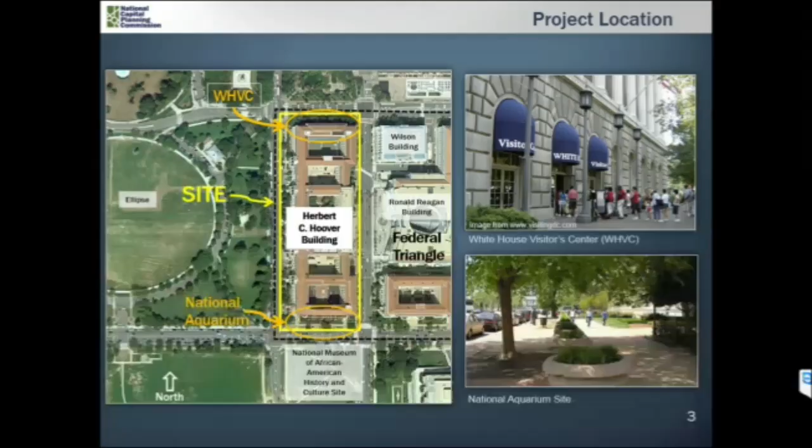14th Street and 15th Streets are major commuter routes into and out of the city. They are also major north-south pedestrian corridors linking the downtown, the White House Visitor Center, which you see here on the upper right, the National Aquarium, the National Museum of African American History and Culture, the Washington Monument, and the National Mall.

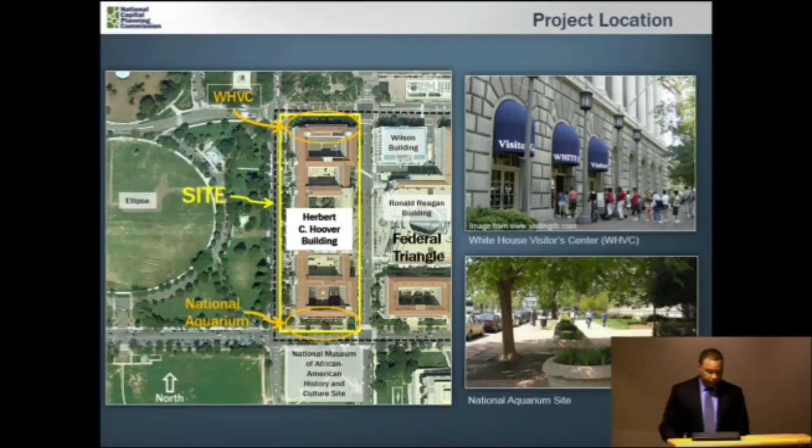Here are a few images of the existing conditions for the pedestrian environment around the building. What you'll notice is that there are long sidewalks with equally long lines of planters. In 2001, the Commission approved the installation of these planters as a security measure for a period not to exceed 18 months. The planters aren't particularly attractive, but they do provide a sense of separation and protection for pedestrians along the busy thoroughfares surrounding the building.

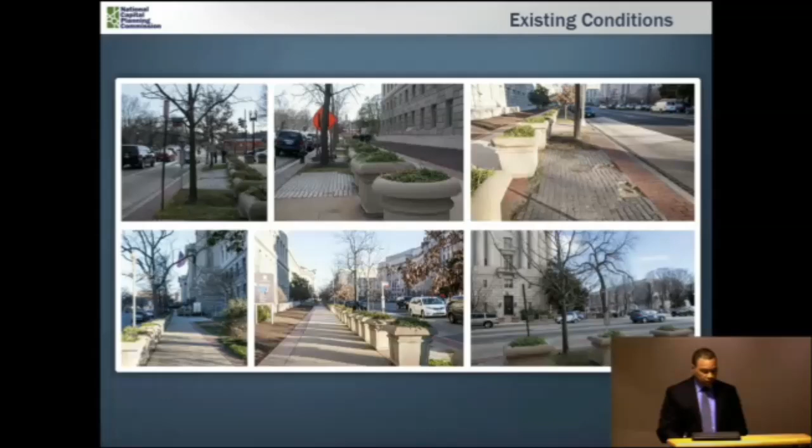You'll also note that the trees are a mix, with some being healthy and some not so healthy. Also, the planting strips will need to be rehabilitated. You may note that there really isn't any seating surrounding the building, with the exception of along Pennsylvania Avenue, where there are a few benches. So all in all, this is not a very inviting pedestrian-friendly location.

This was not consistent with the Commission's policies adopted in 2005 that stated when the building yard is 20 feet or more away from the building, perimeter security elements should be placed within the building yard. The Commission commented favorably on the site and building plans with the exception of the perimeter security and streetscape elements, and recommended that the design of those elements be coordinated as part of a comprehensive design solution for the entire Federal Triangle.

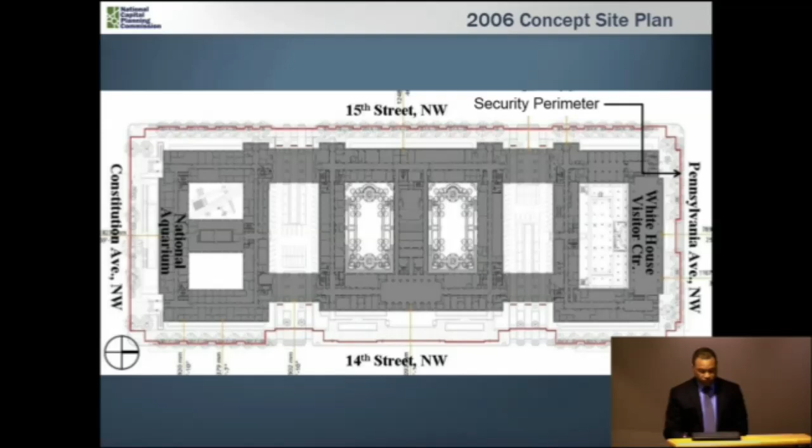In April of last year, the Commission reviewed a revised concept for perimeter security in which the majority of the elements were located at the edge of the building yard. This was consistent with the Commission policies regarding the placement of perimeter security elements, and the Commission commented favorably on this concept.

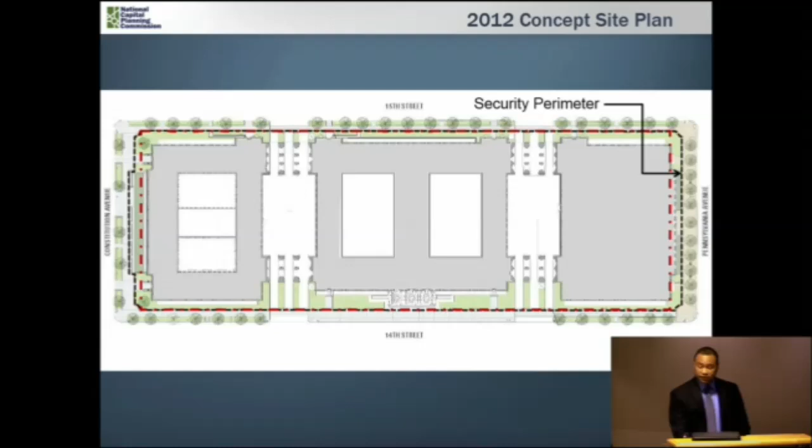In further development of the design, however, GSA determined that the conditions of this site warranted a reconsideration of the design. Specifically, the exceptional length of the block meant that any design that kept to the edge of the building yard would seem monotonous. The volume of vehicular traffic on 14th and 15th Streets degraded the pedestrian experience, particularly in areas where there was no parking to provide a buffer.

Judicious placement of some of the streetscape elements between pedestrians and vehicles could enhance the pedestrian experience, but as long as all of the perimeter security was kept within the building yard, no funds would be used to make improvements to the public right-of-way. GSA has therefore submitted a revised concept that it believes will enhance the public realm in this area, but that is currently inconsistent with the Commission policies against the location of security elements in the public right-of-way.

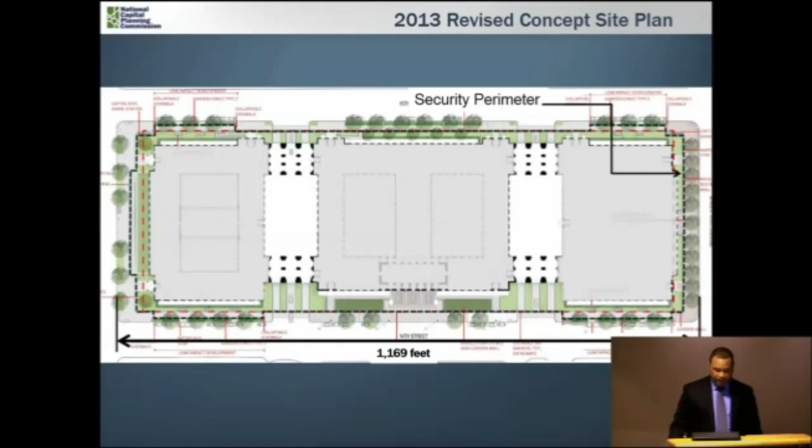Now, the changes that GSA is submitting include realignment of the portion of the perimeter security line from the building yard to the inside edge of the tree planting strip. You see the red lines here, so that's where the revised design is showing.

Providing public seating for tourists and commuters along 14th Street and 15th Street. These are the purple areas shown here.

Eliminating the need for bollards in the sidewalk by using collapsible sidewalks, and I'll show this a little bit later.

Also providing space for Capital Bikeshare stations along 15th Street at the north and south ends of the block. And these are shown here.

Incorporating low impact development elements along some of the tree planting areas, shown here in dark green. And then finally, incorporating security elements into raised planters at the main entrance of the building, shown here in a light green color.

And also relocating the ADA accessibility ramps around them.

This concept design for the areas along Pennsylvania Avenue and Constitution Avenue remains essentially the same as what the Commission reviewed back in April of 2012. So the remainder of my presentation will focus on what has changed.

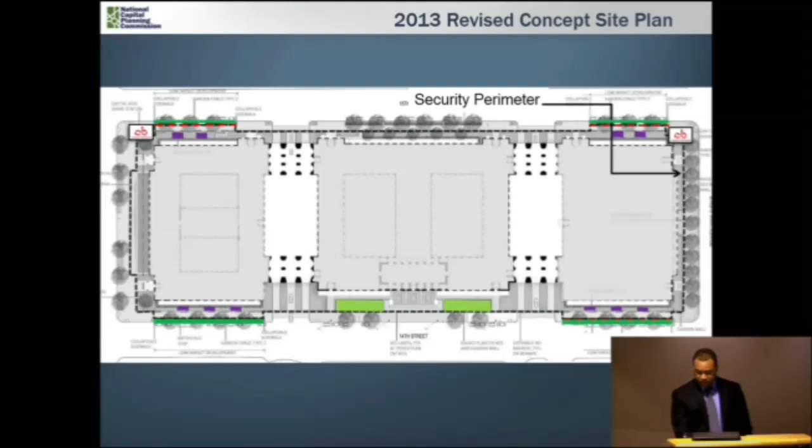What you will need to decide today is whether the benefits of this particular design justify the departure from the Commission's policies regarding security elements in public space.

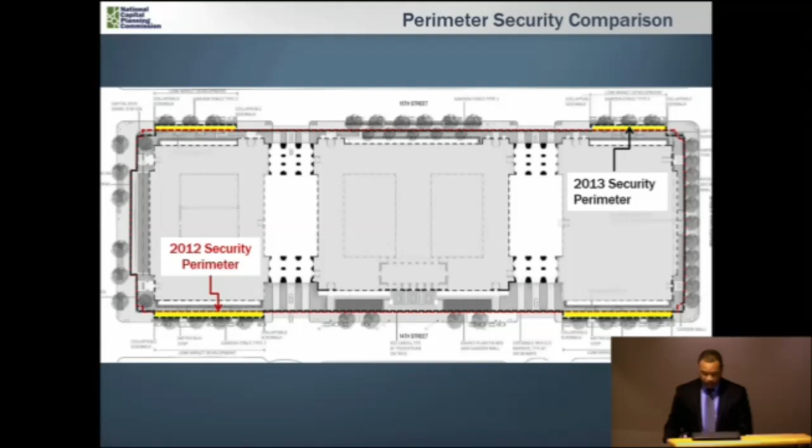This is a close-up of one of the areas where the security line was moved out to the edge of the tree box. This particular image shows 14th Street near its intersection with Constitution Avenue.

The tree box itself will be reconstructed to incorporate low-impact design features to capture stormwater, and the existing trees and soil will be replaced. Bike racks are also included at the end of the tree boxes on the north and south ends of the block.

A cable rail system will provide appropriately rated perimeter security at the edge between the tree box and the sidewalk. Seating areas within the building yard can be used by both tourists and commuters.

There are several commuter bus and metro bus stops in this area, as well as two slug lines.

GSA is exploring the possibility of using collapsible concrete on the sidewalk where the security line crosses the sidewalk. There are some technical issues that need to be resolved, but this would eliminate the need for bollards crossing the sidewalk.

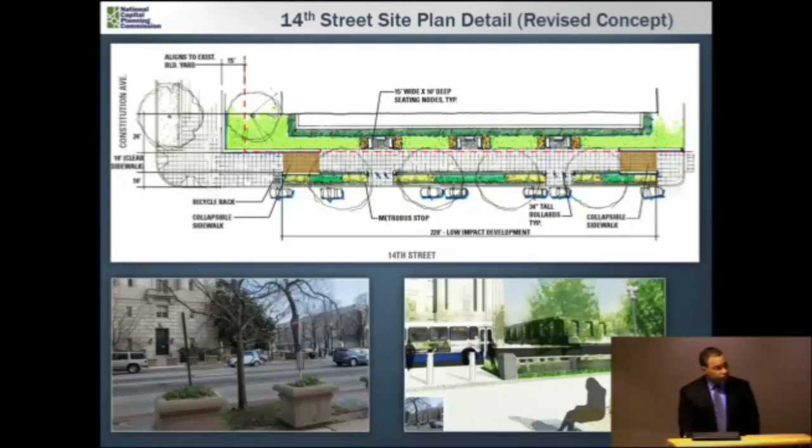And they're shown here in kind of the brownish color. This is a close-up of 15th Street near Pennsylvania Avenue.

This design, the design elements are essentially the same as along 14th Street, but instead of the bike racks near the tree boxes, the plan shows capital bike share stations here and at the other end of 15th Street, which are the north and south ends.

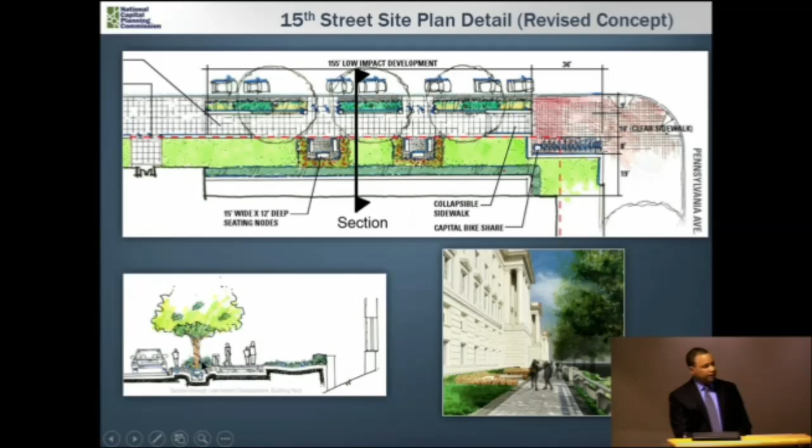And this, on the bottom left, is a section showing the building yard and then the sidewalk with the perimeter security element here, and then the low impact development located here.

At the main entrance along 14th Street, the primary difference between the previous design and the current one is the introduction of two raised planter beds flanking the main entrance, which is here. And they would incorporate the security elements.

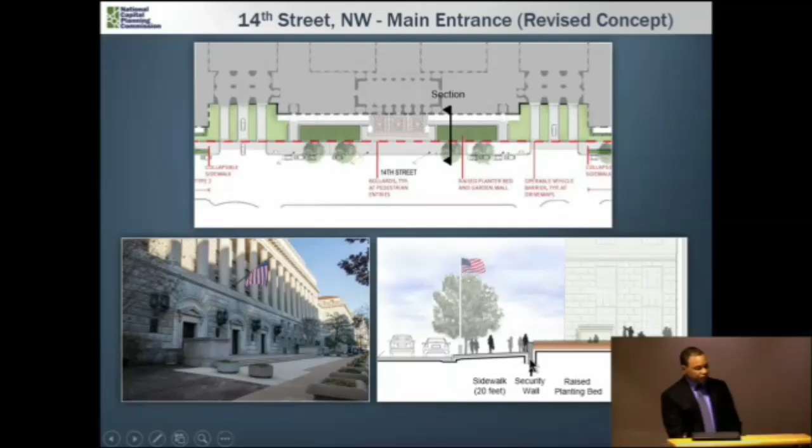And you'll note in the section on this slide, the security element is integrated into the design, and it's adjacent to the sidewalk.

So staff evaluation of this project was based on policies in the comprehensive plan for the National Capital, the Monumental Core Framework Plan, and the policies and objectives that were adopted in 2005 as an addendum to the Urban Design and Security Plan. The most significant of these is probably the last, which includes the objective to strike a balance between physical perimeter security and the vitality of the public realm.

This proposal is generally consistent with policies outlined in the comprehensive plan regarding the rehabilitation of existing federal facilities, support for bicycle use by both government employees and visitors, and enhancement of the settings of historic buildings.

It is not consistent with policies that call for consistency with the objectives and policies of the Urban Design and Security Plan, however. I will discuss that more in a minute.

The design generally supports one of the key proposals of the Monumental Core Framework Plan, which is to link downtown with the National Mall by improving the pedestrian experience in the Federal Triangle. The inclusion of bike share stations, enhanced landscaping, and seating areas all support this objective.

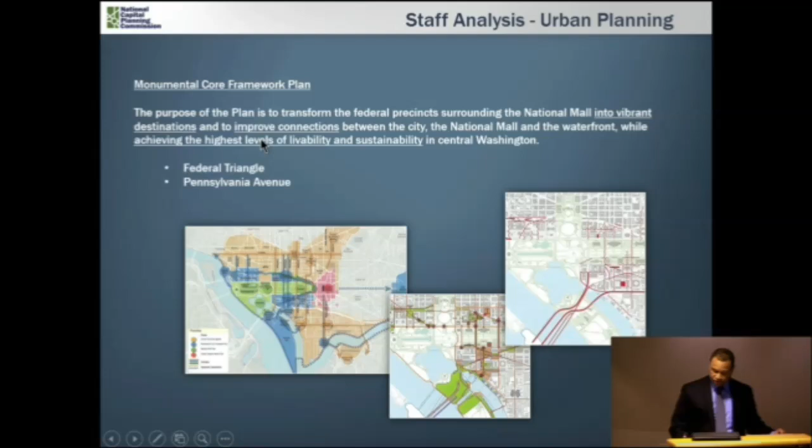The proposal is inconsistent with two of the three policies here, and it may be inconsistent with the third. For existing buildings in urban areas, perimeter security barriers should be located within the building yard when the size of the yard is greater than or equal to 20 feet. If less than 20 feet, the barriers may be located in public space.

The revised concept design is not in conformance with this policy in certain areas. These areas of nonconformance occur along 14th and 15th Streets, which I showed in an earlier slide. An example of that is shown here, highlighted in yellow, where the building yard is 27 feet. While staff is not making an unfavorable recommendation in this case, it is important that the Commission be aware of this policy.

The placement of security barriers in public space is discouraged and should be minimized. While the 2012 proposal was in full compliance with this policy, the current proposal is not. It does, however, represent a significant minimization from what was proposed in 2006, which I also showed earlier.

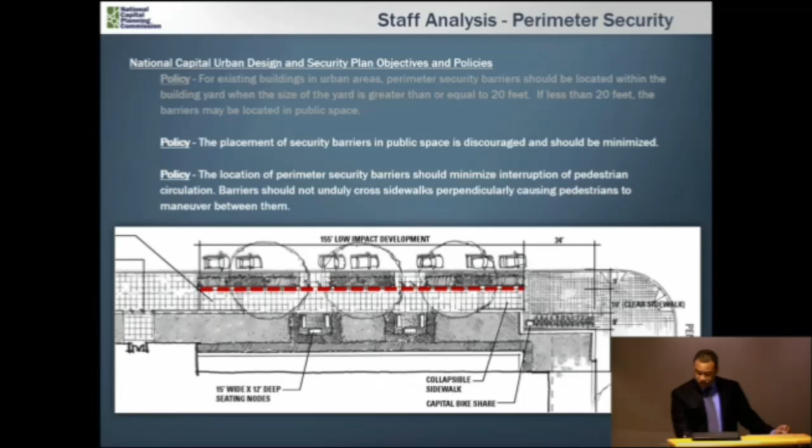Staff recommends, however, that the applicant continue to look for ways to further minimize intrusion of the security elements in public space by designing those elements in a way that is in keeping with the existing local and federal streetscape design guidelines, and by coordinating with the District of Columbia Department of Transportation.

And finally, the location of perimeter security barriers should minimize interruption of pedestrian circulation. Barriers should not unduly cross sidewalks perpendicularly, causing pedestrians to maneuver between them. While the current design is in conformance with this policy, staff notes that there are unresolved issues that may preclude the use of this technology and result in the need for bollards to be used in the sidewalk, and this should be avoided.

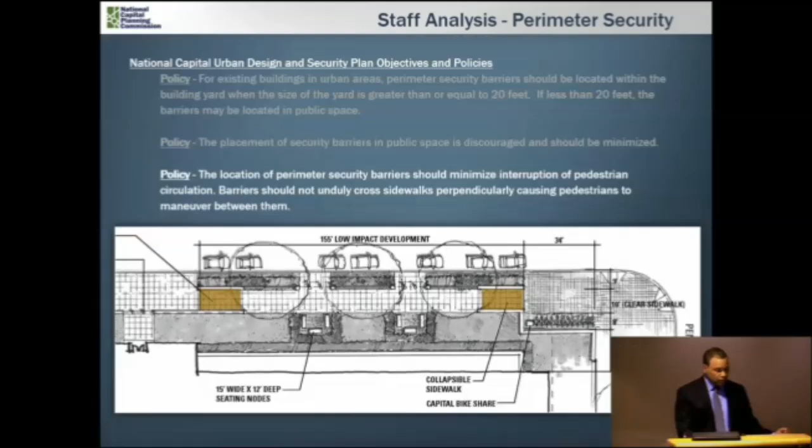With that, Mr. Chairman, the Executive Director's recommendation is that the Commission note the Commission policy stating that for existing buildings in urban areas, perimeter security barriers should be located within the building yard when the face of the sensitive building to the outside edge of the building yard is a minimum of 20 feet. Note that the proposed perimeter security elements located along Pennsylvania Avenue and Constitution Avenue are consistent with this policy and have not significantly changed from what was proposed in April of last year.

Note that the proposed perimeter security elements that are in public space along 14th Street and 15th Street are not consistent with this policy. And note that the unique site conditions, that being a significant increase in pedestrian traffic from 3 tourist destinations opening in close proximity to this site, and both 14th and 15th Streets being nearly 1,200-foot long blocks, may justify an exception in this case.

And therefore, agree to consider a partial exception to this policy for the perimeter security elements located in public space on the condition that the applicant is able to demonstrate in future submissions that the public benefits provided outweigh the impact of the security elements in public space by complying with the policy stated that where security barriers in public space cannot be avoided, they should be integrated into the urban landscape in a manner that minimizes their visual impact and physical infringement into public space.

Supporting the recommendations of the Monumental Core Framework Plan by improving the pedestrian experience along Pennsylvania Avenue and the Federal Triangle through the provision of seating and shade and plantings that provide seasonal interest, and by enhancing perceived safety through the provision of pedestrian-oriented lighting and protection from vehicular traffic.

Here you can see the existing location of INSCOM on the north post of Fort Belvoir. It is located south of the intersection of Beulah Street and John J. Kingman Road. To the west is the Defense Logistics Agency, and in close proximity is the PX and Commissary and the Museum of the Army projects. The main employee entrance on this part of the installation is off of Fairfax County Parkway and John J. Kingman Road.

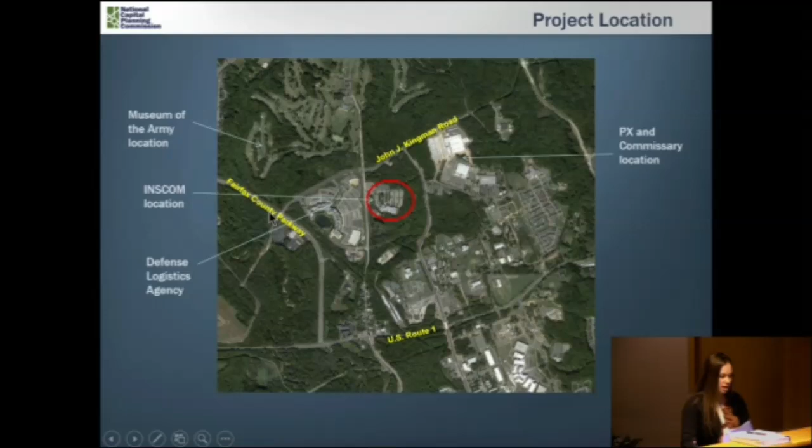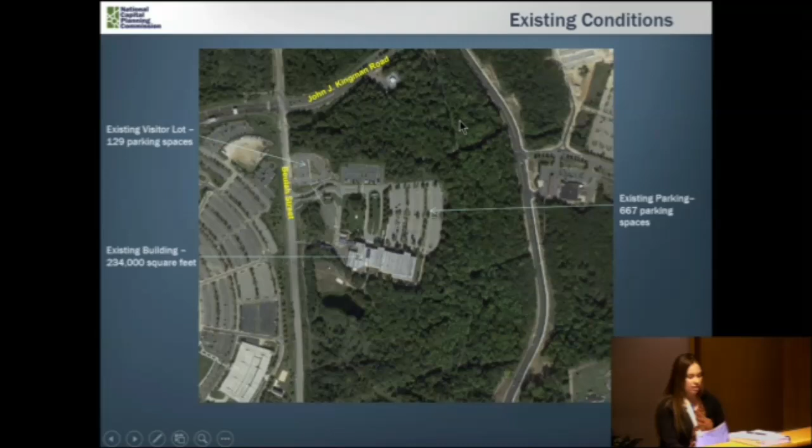Here you can see a closer view of the current conditions on the site. It has a single building on the south of the site with surface parking on the east and north. Due to the agency, it has its own secure perimeter around the installation, accessed off of Beulah Street in this location. Outside the secure perimeter is a visitor's parking lot. Also in this image, on the east is a wildlife corridor that connects to another wildlife corridor north of John J. Kingman Road. This wildlife corridor will not be developed and kind of hems in the development at INSCOM.

So you can see a proposed rendering of the expansion project. It is proposed to occur over 4 phases. It includes the renovation of the existing building, which is in the center here, and the addition to the building, which hugs the existing building, as well as site improvements such as this parking garage.

The expansion project allows 890 employees to be moved to INSCOM. These employees are located in lease space in Fairfax County or in other buildings at Fort Belvoir, and the move allows for greater security and collaboration between employees, as well as alleviating overcrowding in the existing building. The building was built in the 80s and doesn't currently meet code for security or the technological needs of INSCOM. But what we're looking at here today is just Phase 1, which is parking and site improvements.

So you can see here the proposed parking numbers. After the expansion, there will be an additional 1,051 parking spaces on site. Of those, 716 will be for employees. Due to Army regulations, the Army is only proposing to provide 60% of employees with parking. This is within the range of the comprehensive plan ratio, which allows 50 to 66%.

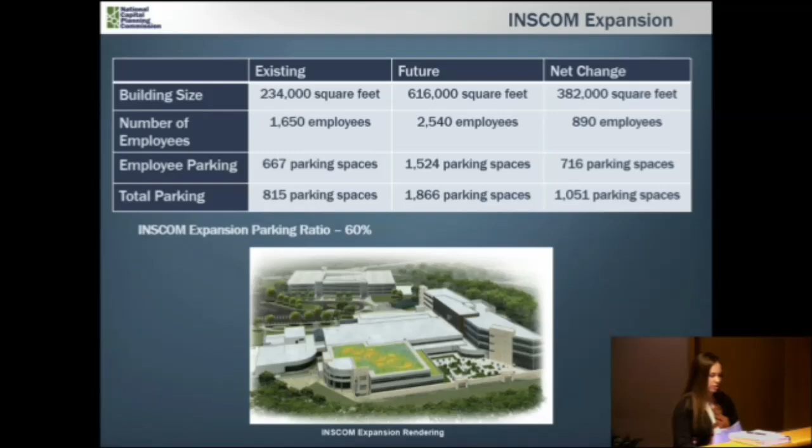As I indicated before, we're only seeing the site plan today, which you can see on the screen. I will walk through the major elements of the site plan in the next couple slides.

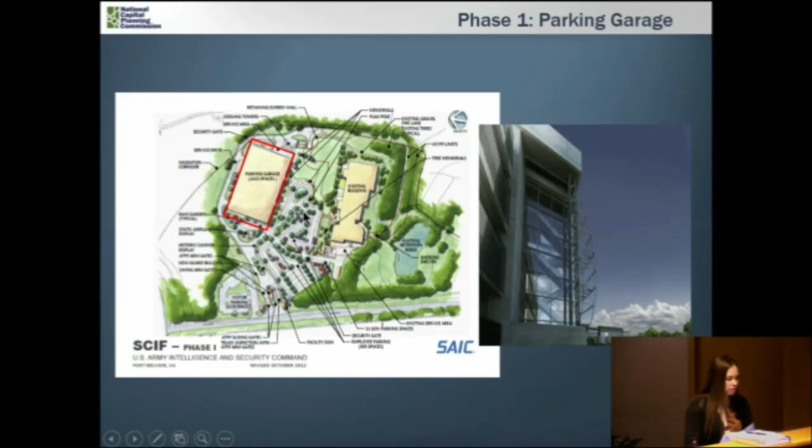The first major element is a parking garage in the northwest. It is 5 stories tall and can accommodate 1,421 parking spaces. The building will be precast concrete, but you can see in this rendering that the stairwells will have this glass and metal material. There are 2 stairwells, one in this location and one in this location, both facing the existing building.

What parking cannot be accommodated in the parking garage will be accommodated in a surface parking lot. There will be 316 parking spaces in the lot, constructed of porous concrete, which you can see a detail of here. The drive aisles will be asphalt, but the parking stalls themselves will be porous concrete, and this is what is located throughout Fort Belvoir.

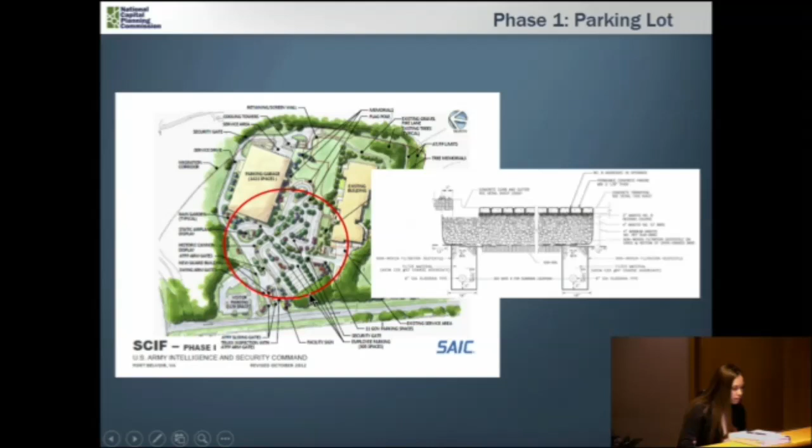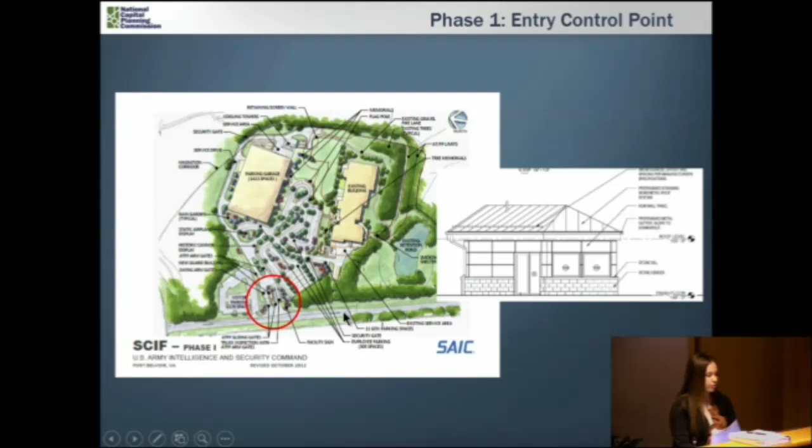And on the west of the site is a new entry control point. The access point to INSCOM has not changed, just the security elements. So there'll be a new guard booth, a new security fence, and a new pedestrian access point.

Here in the site plan, you can see how the parking lot has been laid out to allow for large landscaping beds for trees and landscaping, as well as displays. In this location is an airplane display, as well as a cannon display, and a few memorials. The landscaping beds also allow for some rain gardens, which you can see a detail of one here. There are 4 rain gardens to handle some stormwater on the site.

In addition to the porous concrete in the parking lot, there'll be a rain harvesting system next to the parking garage, as well as grass swales, and the existing retention pond will be retrofitted to handle stormwater. The project meets all stormwater requirements, including EISA 438, and staff has referred the project to Fairfax County, whose stormwater group has reviewed the techniques on site and commended the Army for them.

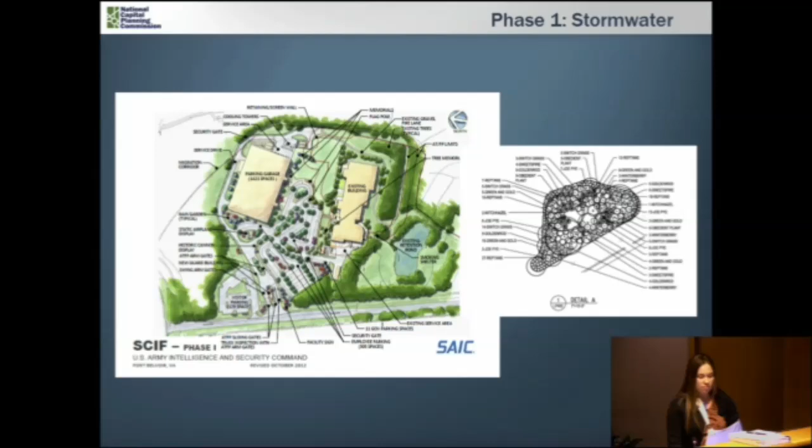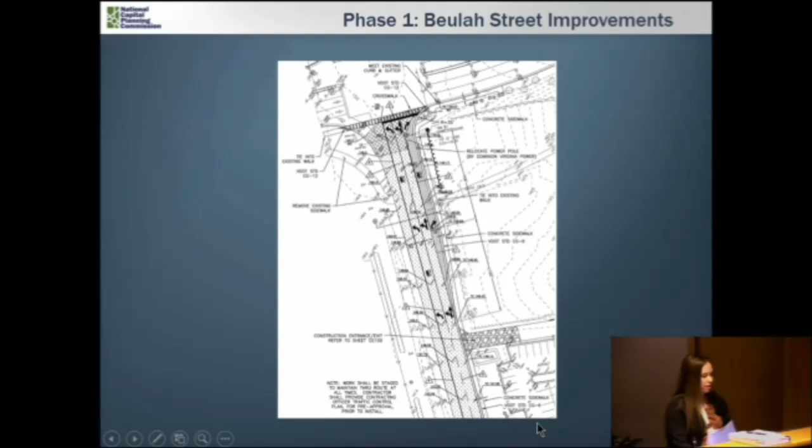Off-site, the Army is proposing to create a new right-hand only lane on Beulah Street connecting to John J. Kingman to improve intersection flow in this location, as well as proposing a new sidewalk from John J. Kingman down to INSCOM. Currently, there is no sidewalk, so this improves pedestrian flow in this location.

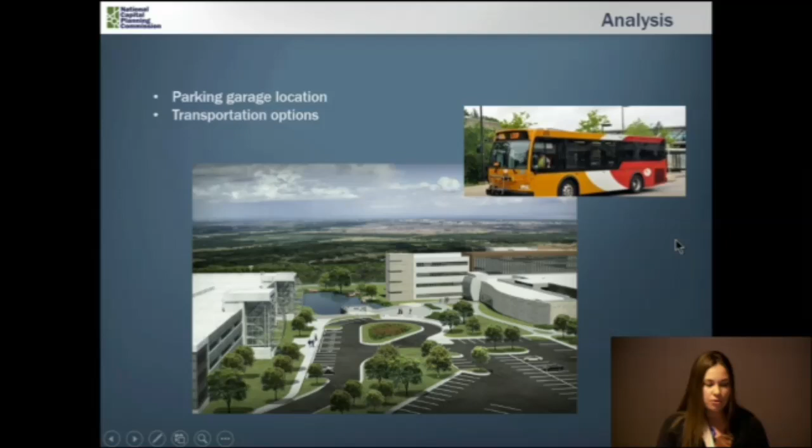Overall, staff is supportive of Phase 1 of the project. It has positive aspects such as a multi-level parking garage, porous concrete, rain gardens, and a rain harvesting system. We do have a few comments regarding the parking garage location and pedestrian elements of the site.

In 2012, the Department of Defense revised its ATFP standards, which allows parking to be located closer to the building. So we encourage the Army to evaluate moving this parking closer to retain as many trees in this location as possible. These trees are located adjacent to the wildlife corridor, so we're encouraging their retention. I would like to note that any trees removed as part of this project will be replaced at a 2-to-1 ratio near the project site.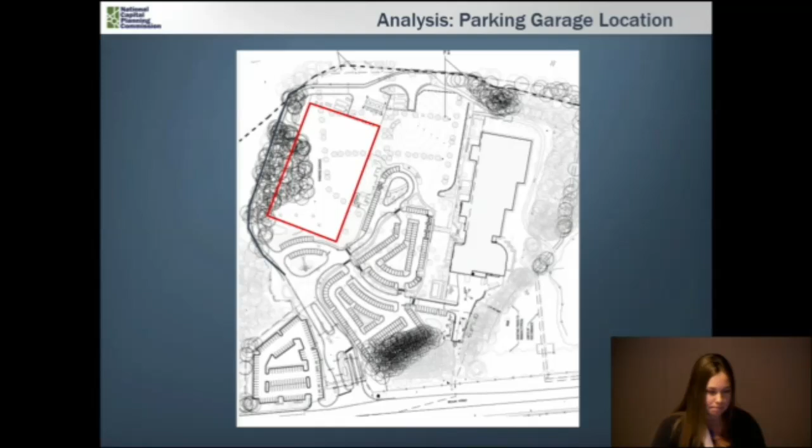Regarding the TMP, as required by NCPC guidelines, the Army has submitted a TMP, which staff has found very informative and well organized. However, the TMP we received was a draft with a May 2012 date, and some things such as parking numbers have changed since then, so we encourage a final TMP submission.

Also, we have comments regarding the goals and objectives section of the TMP, which we encourage the Army to reevaluate, to provide timelines and metrics to allow for evaluation of the TMP programs to see if they're working, as well as monitoring these programs throughout the life of the TMP.

We also request that there is a parking phasing plan within the TMP. Phase 1 includes all the parking for the site prior to the moving of the 890 employees to the site. So we encourage the Army to evaluate ways to limit the parking supply prior to full move-in of employees to be in compliance with the comprehensive plan ratio.

One of the comments we received from Fairfax County is that the Army should evaluate whether or not the existing route will be sufficient to service INSCOM, or whether or not an additional leg to the bus route is necessary. So we encourage the Army to evaluate that. Lastly, we encourage the Army to evaluate bicycle amenities.

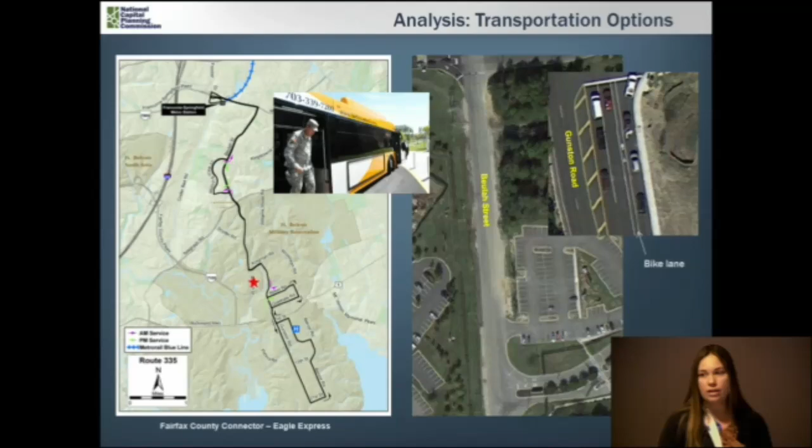They had recommended a bus loop be provided at or near the Beulah Street entrance. Right, so is that there, or not? There's not one now. Okay, is there plans to consider that further, or do you know? That's what we're encouraging the Army to evaluate. Okay, I haven't looked, right, sorry.

That's fine. So with that, it's the Executive Director's recommendation that the Commission approve the preliminary site and building plans for Phase 1 of the INSCOM expansion. It recommends that, prior to submitting final site and building plans, the applicant evaluate moving the parking garage closer to the building, a bus route and bus shelter location in cooperation with Fairfax County, and bicycle amenities.

Request that the applicant provide the following at final review: responses to Fairfax County, VDOT, and NCPC's comments, and a final TMP that reflects current conditions and information. The TMP should also include stated goals and objectives with timelines, a description of the process for monitoring and evaluating the achievement of goals and objectives, and a phasing plan for employee parking availability. Mr. Chairman, that concludes my presentation.

All right, thank you.